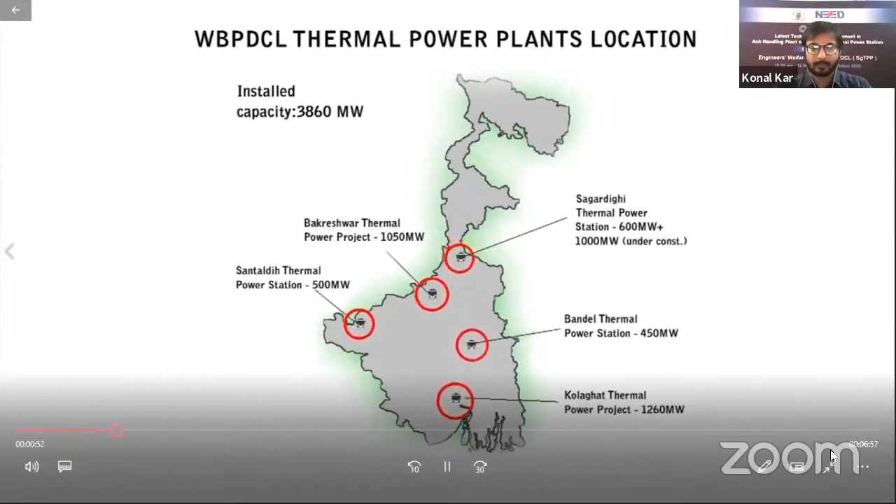It operates through its local bodies based in Sagardighi Thermal Power Project, Santaldih Thermal Power Station, Bakreshwar Thermal Power Project, Kolaghat Thermal Power Station, Bandel Thermal Power Station, and the WBPDCL Corporate Office at Kolkata.

EWF has time and again come up with practical and relevant training courses for its engineers in the areas of vibration analysis and balancing, coal characteristic and sampling, NDT boiler tube metallurgy, power transformers operation and maintenance, availability based tariff, GST, and also in regular software domains like Advanced Excel, AutoCAD, MS Project, etc.

Prayas, the flagship social event of the EWF, is an effort through which a total of 500 underprivileged but meritorious school students residing around WBPDCL's power stations are felicitated every year with school bags and a year-long supply of study kits. This initiative also aims to nurture and fulfill the social obligations of our engineers. Such events help develop a cordial relation with the underprivileged local people at various power stations.

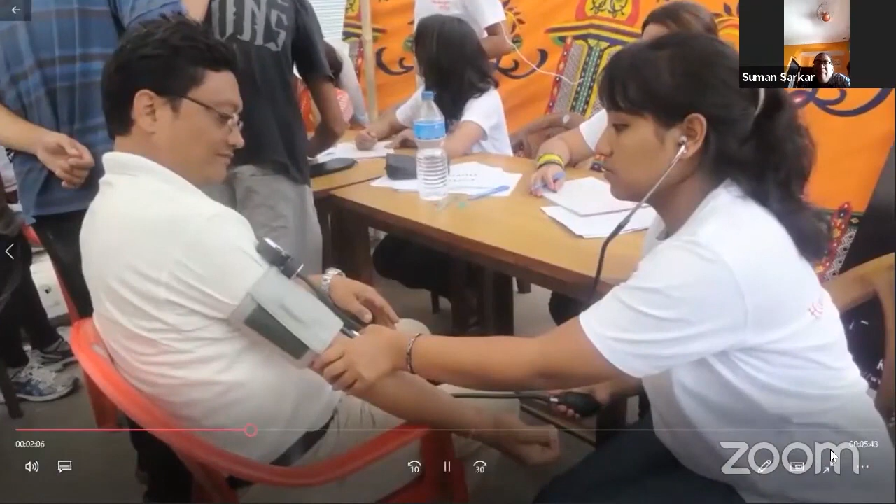In view of the shortage of blood at different blood banks of West Bengal, EWF came forward to organize blood donation camps at the townships of Kolaghat and Santaldih thermal power stations in the year 2016. The Honorable District Magistrate of Purba Medinipur, Dr. Rashmi Kamal, IAS, and Dr. A. Datta, the Chief Medical Officer of Purulia, graced the occasion as chief guests respectively. A sum of Rs 50,000 has also been donated to the Chief Minister's Relief Fund for the Nepal disaster.

EWF also operates catering services at remote power stations through its self-functioning eateries. This helps engineers staying away from their families avail home quality food at reasonable prices even at distant locations.

Eateries, especially the one at Santaldih Thermal Power Station, have greatly benefited the engineering community since finding food at that remote location used to be a huge ordeal before.

National seminars and workshops have been organized by EWF every year under the flagship program NEED, National Energy Excellence Drive, covering energy-related issues which may enrich the Indian power sector.

So far, the following national seminars have been organized: Importance of Water Chemistry in Thermal Power Plant in 2011, Coal Management for Thermal Power Plant in 2013, Emerging Power Scenario in India in 2014, Non-Conventional Power Scenario in India in 2015, Competitive Economics of Indian Thermal Power Generation in 2016, and one workshop on Pollution Control in Coal-Based Thermal Power Plant in 2017.

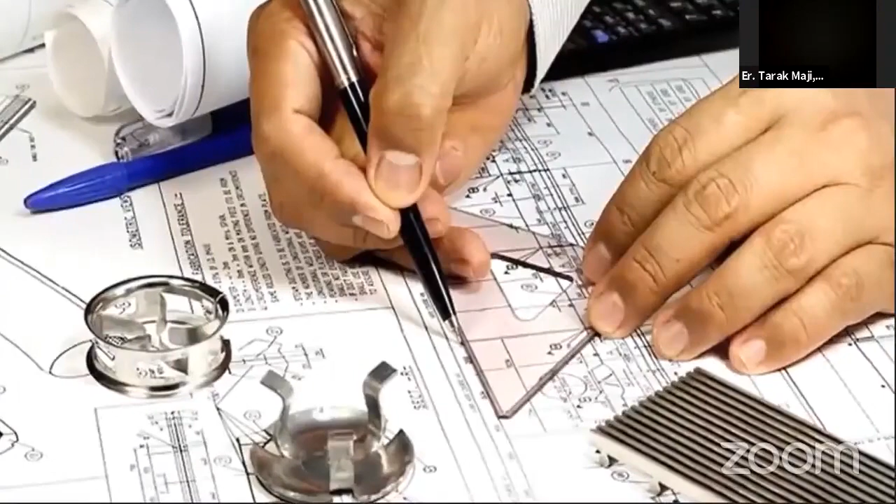Engineers Welfare Forum has come a long way from being a nascent body of few visionaries to a collaboration of almost 700 engineers of the WBPDCL.

All along, EWF has nurtured the aspirations of its young engineers who in turn have pulled out WBPDCL from stasis to growth and prosperity. Engineers Welfare Forum of the WBPDCL pledges to continue this journey with similar grit and enthusiasm in the coming years.

Thank you so much. That was a lovely video, and from this video, you have come to know about the lovely job done by EWF, not only to raise their organization but to help socially towards other people and organizations.

Adding to this, in the last 6-7 months we were having ups and downs. To be precise, we were having a hard time where many lives have been lost in this pandemic, where people are stepping forward, people are moving forward, lending their helping hand towards the frontliners, where EWF is not lagging behind. EWF has come forward and donated a sum of rupees 2 lakh one, and delivered a cheque to Ramakrishna Mission to help the frontliners and to fight this COVID-19.

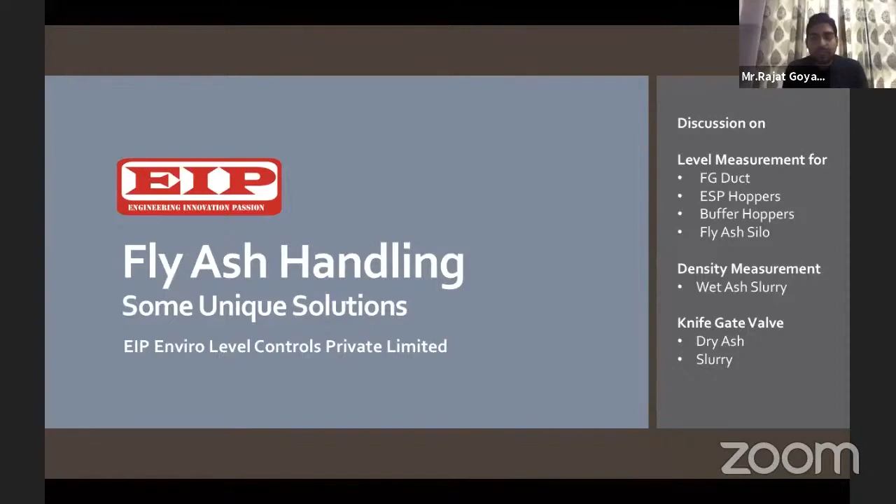Without wasting time, we will shift on to the topic that EIP Enviro Level Controls Private Limited is offering for today, which is basically fly ash handling and some unique solutions. Before we start the presentation, I have a brief introduction about EIP.

EIP is a company that started in 1983 by Dr. Ravinder Goel, and we started with the first indigenous manufacturing of the RF level switch for ESP fly ash hoppers. We take pride in the fact that currently almost 80% of the power plants in India are using EIP's RF level switch for their ESP fly ash hoppers.

Since then, we have moved on to a different product portfolio, which includes all the ranges of level measurement products, starting from point level measurement to complete inventory level measurement, then flow measurement, density measurement, and some valves. In the last 3 decades, we have been highly focused towards our customers, bringing them the most advanced solutions and providing prompt services. That has been the reason behind our success and persistence for the last 30 years.

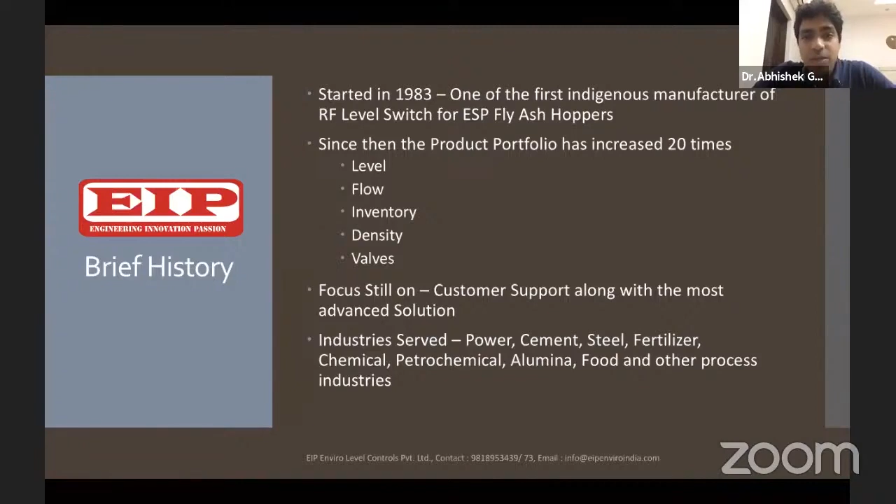The industries we are catering to are power, cement, steel, fertilizer, chemical, petrochemicals, alumina, food, and other process industries. So basically, wherever there is a requirement for level, flow, inventory, or density, EIP is always present with a unique solution to offer to that industry.

Now we will move on to the first topic of discussion. I'll brief you about the structure of the presentation. We'll be covering the presentation in form of challenges, discussing a challenge faced by the ash handling plant and the solution EIP has to offer for that specific challenge. Challenge 1, we will talk about the FG duct.

I'll just request Mr. Rajat to brief about the challenges being faced in a flue gas duct. Over to you, Rajat. Thank you, Abhishek. First of all, good morning to all, and thank you for this opportunity. This is a special application which we did in collaboration with NTPC recently.

What we observed with NTPC was that in the FG duct, the duct between boiler to ESP, in plants above 500 megawatt, the velocity of ash traveling from boiler to ESP was very low when the plant was not operating on full load. Due to that, the ash was getting accumulated in the flue gas duct.

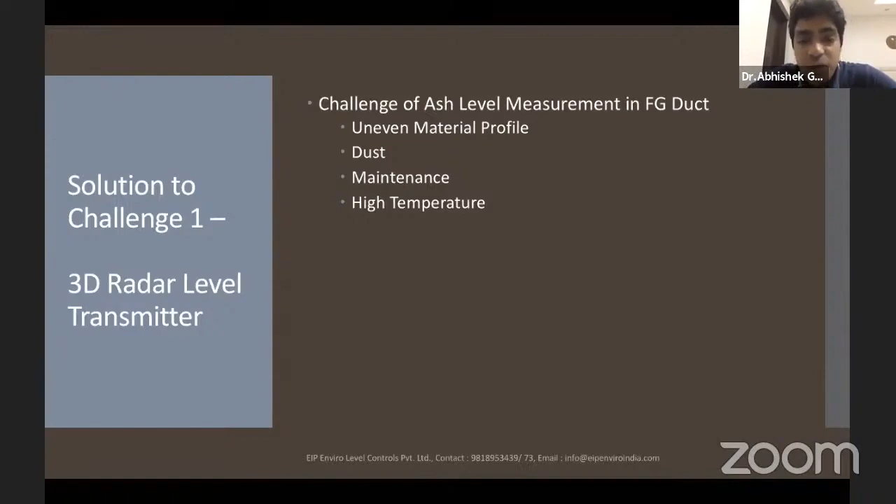Why is ash accumulation in the FG duct very critical? The reason is the ash always accumulates in an uneven profile. There will be a lot of dust, maintenance issues, and very high temperature to the tune of 350 degrees Celsius. So the solution we offer is a 3D radar level transmitter. There are 4 critical points in the FG duct starting from the boiler to the ESP, wherein the ash accumulates the most.

Therein we will install our 3D radar level transmitter, which is the world's first multi-beam radar operating at a frequency of 140 gigahertz. What it provides is the average level of the ash accumulated within that critical point, the maximum level of the ash accumulated, minimum level, and the volume of ash within that critical area of the FG duct. It works in heavy dust without air purge and works at very high temperature.

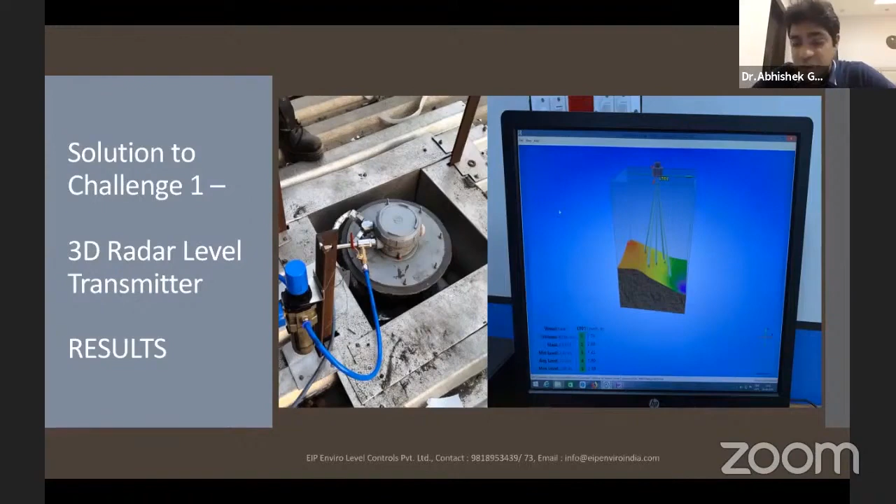Now we come to challenge 2, which is basically fly ash silo level. So people usually ask us, why is it critical to measure fly ash level? The reason is fly ash these days is revenue. And as they say, a penny saved is a penny earned. So the inventory management of fly ash, if that can be regulated, is a direct revenue to the plant, because we are selling the fly ash to cement plants and other process units.

Now, again, the fly ash measurement, as for any bulk solid, is critical because fly ash is always accumulated in an uneven way. There is a lot of dust inside a fly ash silo, and there are multiple maintenance issues. Added to that, fly ash silos are running almost 24 hours. There is filling or emptying, some process always going on. So you cannot miss a reading of inventory, and you cannot afford a shutdown caused by a level transmitter in a fly ash silo.

So the solution again remains the 3D radar level transmitter, whose features I've already explained. On the right side of the screen, you see how a 3D radar level transmitter would be working in a fly ash silo. It has 5 beams in different directions. Using these 5 beams, I'm able to generate a real-time 3D profile of the material because it has XYZ coordinates of those 5 points. Joining them, we get a real-time profile of the material.

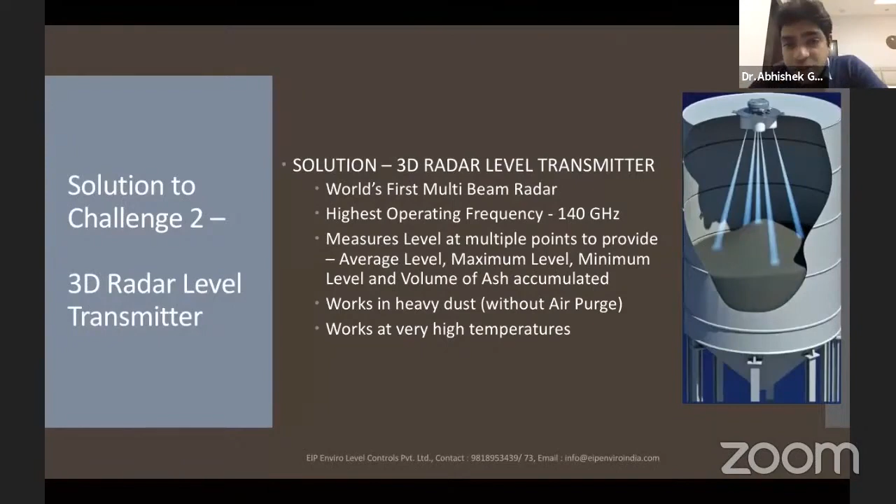As the world is currently moving towards complete 3D profile management for various activities, we also say why not do a complete 3D profile assessment of bulk solids and powders, because this gives you a lot of information about your inventory. And obviously you have the volume and the mass at hand at all times. Now let us have a look at a small video on the 3D radar level transmitter.

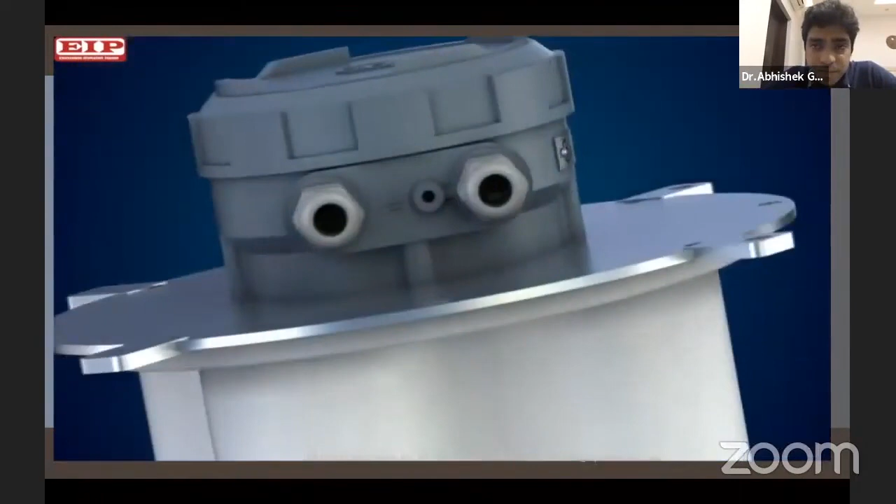So as I said, this is at 140 gigahertz, and you see this is a single beam measurement. You can see the kind of error you may have because of a rat hole that is formed, something like this. Now, if you have a 3D radar level transmitter installed in the same silo, you will have a profile which is real time in nature, and you can see on the left side the profile is generated just like what is shown on the silo.

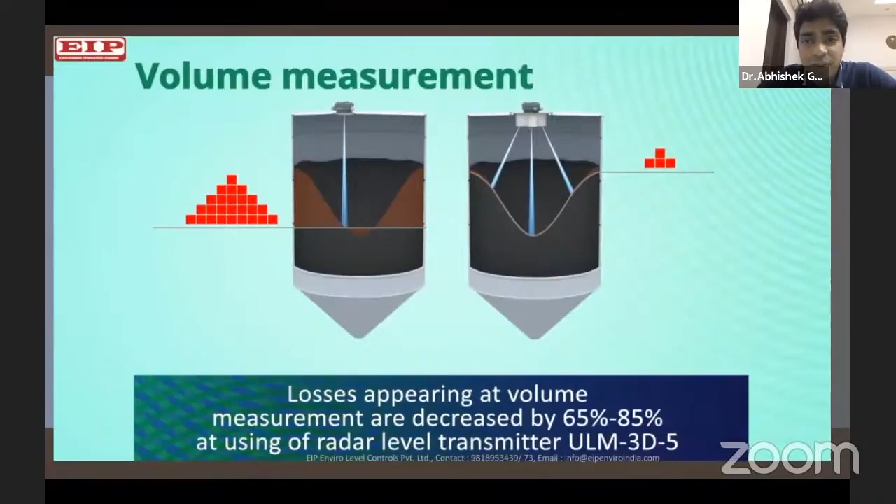And when you do a comparison, you can achieve very high accuracies to the tune of 2 to 3% when you use a 3D radar level transmitter compared to a single beam radar level transmitter. This is a real live video where we have a silo, and you can move the 3D profile and actually see how the material is taking shape within the FG duct or a fly ash silo. So these are 2 sensors installed in the same silo. You can easily imagine, with a single beam radar, how uneven my readings would be.

So now I will move on to the next unique challenge, which is very close to the heart of EIP. Why I say heart of EIP is because EIP started the business with ESP fly ash hopper level measurement. We mentioned the RF level switch, which 80% of the power plants in India are using. EIP make RF level switches, and 100% of the power plants have a mandatory requirement of an ESP ash level indicator or an RF level switch.

So this topic is very close to our heart because we understand that ESP level measurement is very critical. And why do we say it is critical? The reason is in front of us in terms of the recent accidents where we have witnessed ESPs collapsing in well-established big power plants. Current measurement is only a switch. A switch gives a high and low level. You never know what is happening apart from that high or low level.

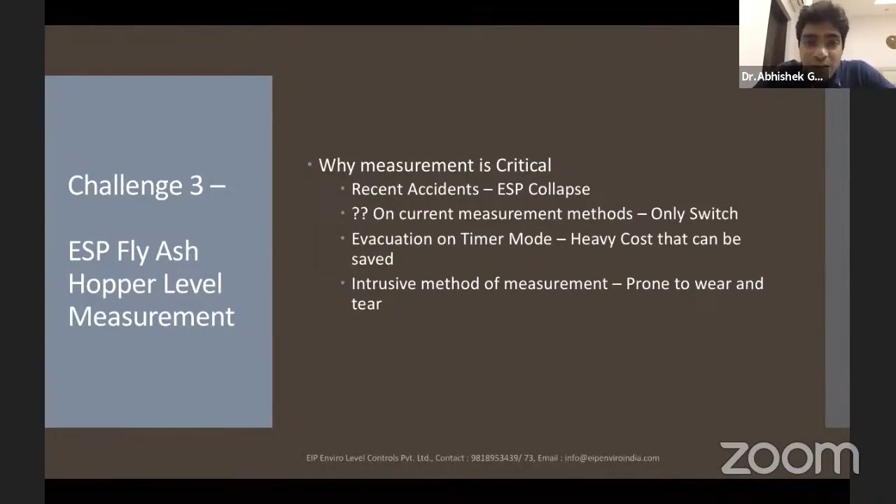Then again, the fourth point of criticality is whatever measurement principles we are using are intrusive type. What I mean by intrusive is it is installed within the ESP hopper. Anything that is installed within the ESP hopper is prone to wear and tear. The reason being, the fly ash in the ESP hopper is high temperature. There is a lot of electrostatic charge, and plus ash has its own abrasive nature. So all these points make it very critical to have a very robust system for ESP ash hopper level measurement.

So let us look at the principle behind it. The principle is very simple: the NOGS sensor detects the gamma rays which are present in the fly ash. Yes, the coal fly ash is radioactive. There is a separate theory which says why coal ash is radioactive. You can send us an email after the presentation if you want scientific literature on that. But as of now, let us focus on the fact that coal fly ash has radioactive gamma rays, and the NOGS sensor is only detecting those gamma rays.

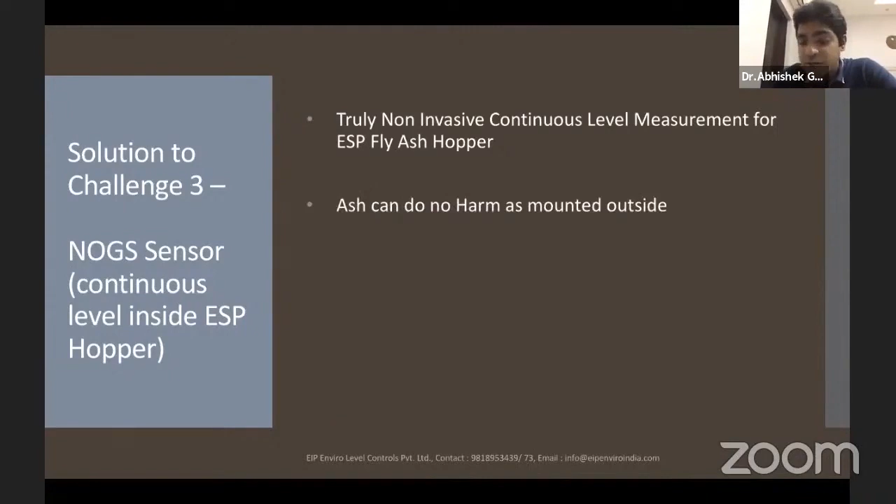So you see, this is completely non-invasive continuous level measurement. Fly ash can do absolutely no harm to this sensor. It is easy to calibrate, easy to use. It is like your eyes inside an ESP hopper. So you can now virtually see what is inside the ESP hopper in a continuous measurement through this NOGS sensor, and you can practically operate your evacuation based on this NOGS sensor. So what we say is the evacuation now is running on NOGS mode.

NOGS mode is wherein this NOGS sensor gives you a feedback automatically: yes, this hopper needs to be evacuated. This is truly a cost saving benefit wherein you can realize the return on investment from day one of installation of this NOGS sensor in the fly ash hopper.

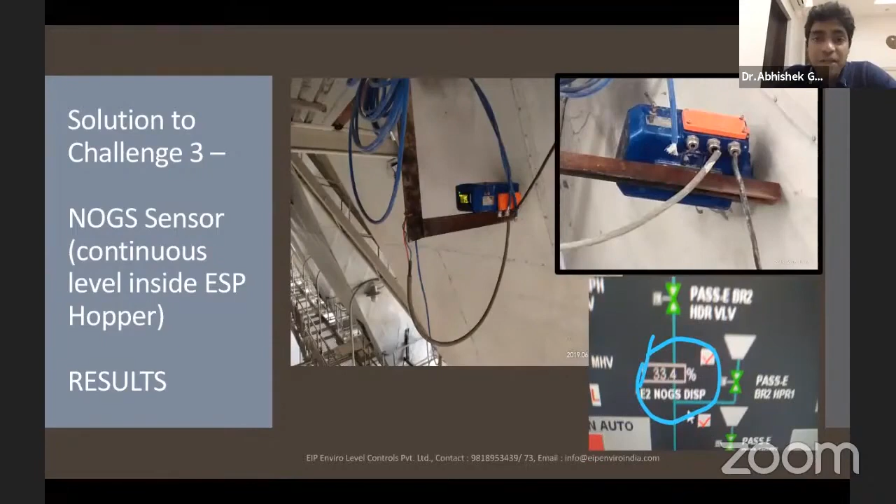So now let us move on to challenge 4, buffer hopper level measurement. Again, buffer hopper is the intermediate transit hopper wherein overfilling and underfilling are critical problems, and it is operating at a very fast speed. It fills up very fast, empties very fast, and it is in continuous operation. The challenges of buffer hopper remain the same as fly ash: dust, maintenance, 24-hour active, and high temperature. Adding to that is high pressure inside a buffer hopper.

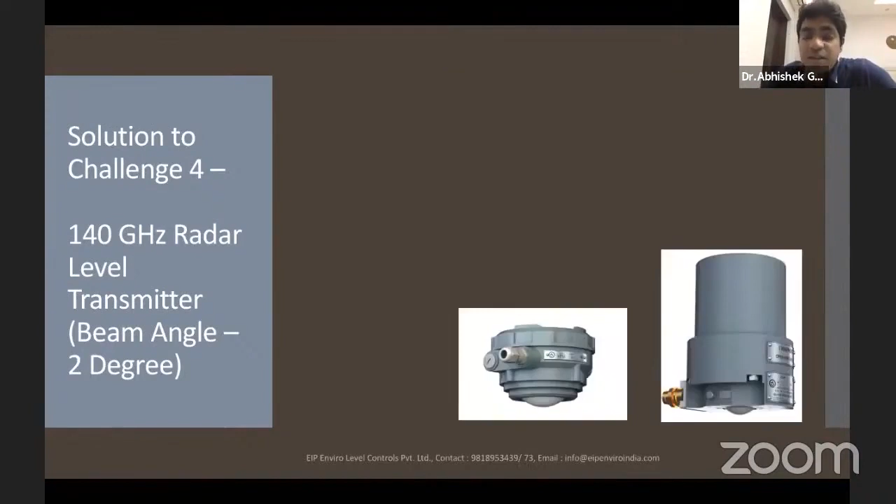So what is the solution that we offer? Because a buffer hopper is very small, maybe 3-4 meters, going with the 3D radar technology may not be always advisable given its size. So we have this 140 gigahertz radar level transmitter installed in the buffer hopper. It is the world's smallest beam angle radar, at 2 degrees, works in heavy dust without air purge, with very high temperature, and can even pass through a blind PTFE.

This is a fact to be noticed. If you see this small sensor in the center, if you place a PTFE disc below this sensor, a blind, the rays can pass through it and get back through it. This is the kind of accuracy and power with which this radar level transmitter works.

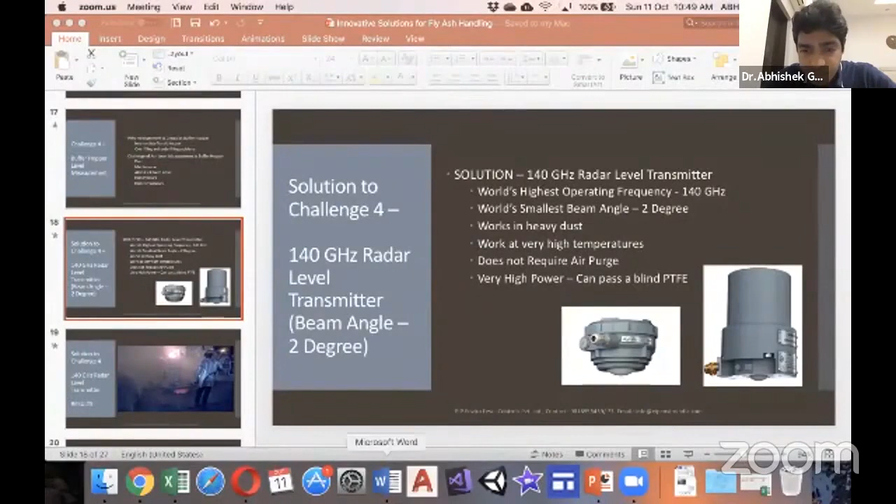So I'll just share my screen once again because I have a video which I want to share. Just a second. Share computer sound. Just a second, sir. Is the screen visible, sir? Rajat, screen is visible? Yes, sir. Screen is visible. So I wanted to show a video. Is the voice coming? Yes, it's coming.

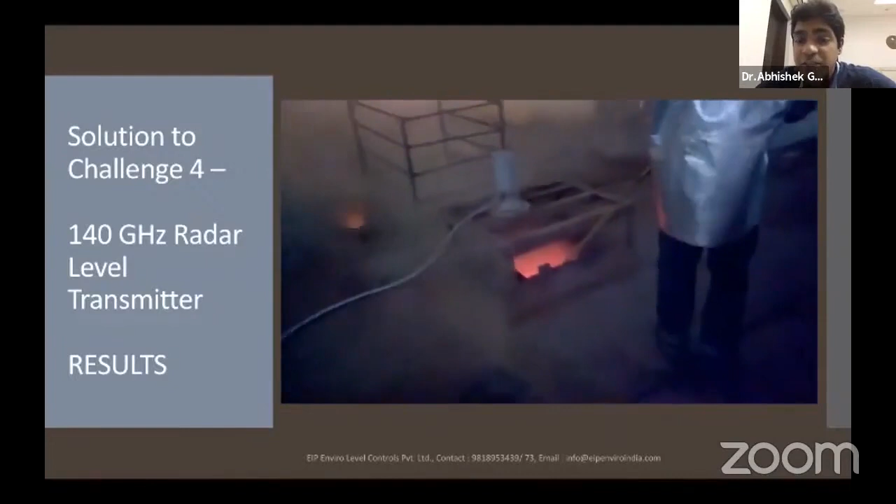This is an installation of this kind of radar, not in a power plant, but installed at a temperature of 1200 degrees Celsius, working in such a stringent condition. You can see there is dust, fumes, temperature, and this radar level transmitter is giving an accuracy close to 2 to 3 within this environment. This is molten metal being poured inside a vessel, and if something works in this stringent an environment, it is supposed to work in a buffer hopper. So this small video shows that this 140 gigahertz radar level transmitter is the most optimal device for buffer hopper level measurement.

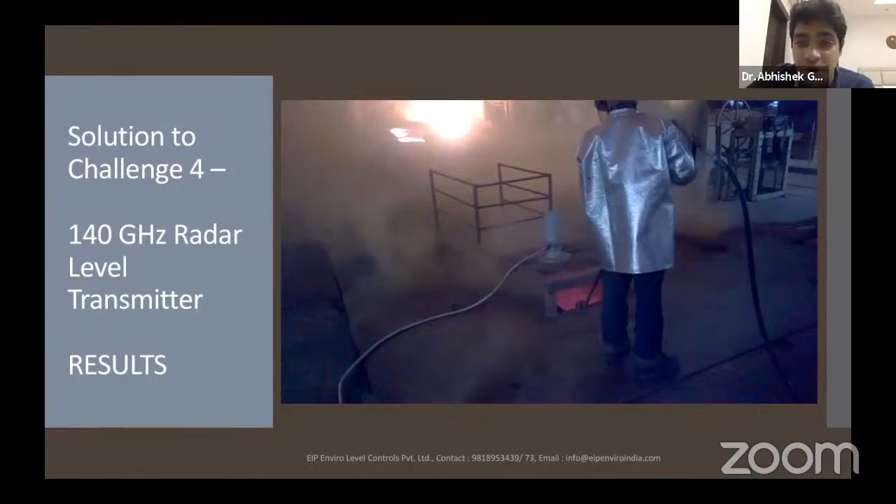Now we come to challenge 5, which is density measurement of wet ash slurry. This is applicable for power plants having wet slurry discharge. Why is density measurement of wet ash slurry important? Because if the slurry is too dilute, there is loss of water, and if the slurry is thick, we have chances of pipe choking. These are very brief, gross level criticalities for ash slurry measurement.

The current challenge faced by the industry is that the density measurement which actually works easily is the wetted and contact type. But the problem with wetted or contact type is it does not last long in ash slurry. Ash slurry is very abrasive. It damages the sensor, it chokes the sensor, it chokes an inline density meter. Whether an orifice type, a Coriolis type or a vibration type, whichever contact type density meter you use, it does not work for long and is practically of no use. The only non-contact solution currently available to the industry is nucleonic type. But the nucleonic type has its own problem.

It has AERB restrictions. There is license for usage. You might be needing a radiation safety officer. You need to submit a report every half year. And there are chances of frequent surprise inspections by AERB.

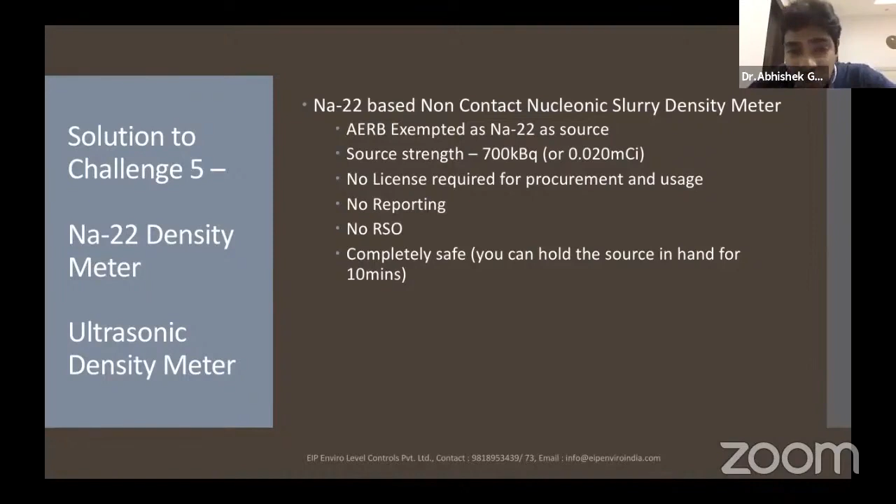The second solution that we have is ultrasonic clamp-on slurry density meter. Yes, you have heard of ultrasonic clamp-on flow transmitters, but we have introduced an ultrasonic clamp-on slurry density meter. It works on the principle of sender and receiver ultrasonic waves, wherein the attenuation of the ultrasonic waves gives an accuracy as good as a nucleonic device. So density measurement can be done as accurately as a nucleonic device. It is mounted outside the pipe.

Now the question comes up, which device to use? Basically this is an application problem, so we request customers to send us the application details, like the diameter of the pipe, size of the pipe, the slurry, expected slurry density, and based on that we take a decision whether ultrasonic would be the best fit or an AERB exempted nucleonic density meter would be the best fit. So again, this is a solution which the power plant industry was looking for, and here we are with a solution for the measurement.

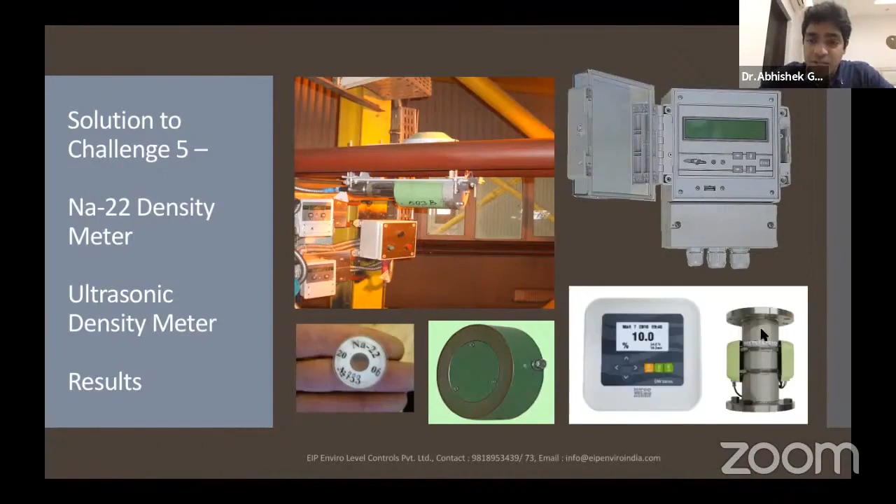So I just want to clarify these 2 points over here: this nucleonic density meter for slurry measurement uses a source and a detector which are exempted from AERB. Continuous level measurement for the ESP hopper was using only a detector. There was no source and there is no approval required. This is the ultrasonic clamp-on density meter. The picture on the right bottom is the ultrasonic clamp-on density meter.

So now I would request Rajat to enlighten us about challenge 6, what we call the valves for dry fly ash and ash slurry. Over to you, Rajat. Thank you, Abhishek. So in ash slurry applications, one of the major challenges faced by the customer is transportation of ash, generally fly ash and ash slurry.

So the knife gate valves conventionally installed in an ash handling plant generally tend to wear down due to the abrasion and corrosion of slurry. Fly ash is a very abrasive slurry. So generally in 2 months' time, conventional knife gate valves tend to wear down, and every 2 months the customer has to take a shutdown and replace the seat, gate, and the body.

So this is one of the challenges customers are continuously complaining to us about. And generally this shutdown time is quite long because these valves are heavy and replacement takes a lot of time. And it's very expensive also, like in fly ash, what we have experienced in the DVC plant, Durgapur. The fly ash is being transported to one of the cement factories, and replacing the valve continuously after 1 or 2 months is very expensive, and they have to completely stop the line and then replace the valve.

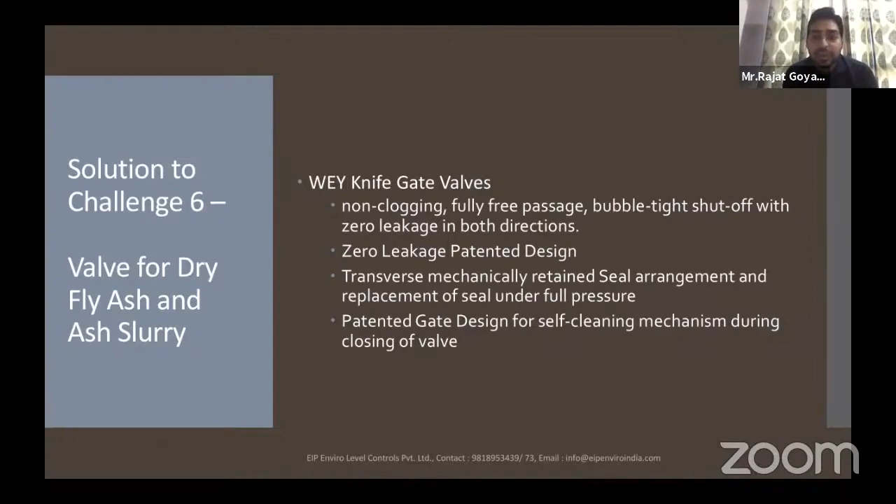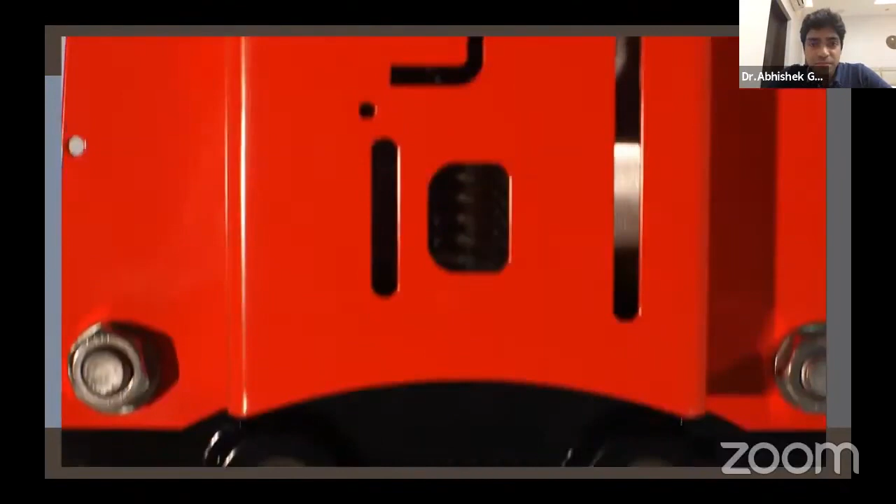So the specialty of these valves is in the gate design and the body design, which is a patented design of this Swiss company. As you can see, the gate design is a straight gate. Conventionally, the gate design is a 180-degree arc. Here it's a straight gate with a mechanically retained seal between the two bodies. While in service, as you can see, there's leakage during operation after a year or two.

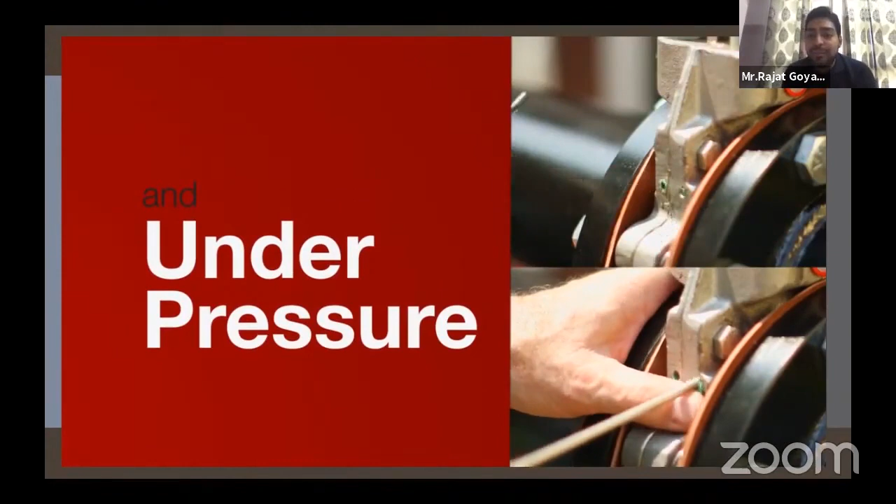So in full pressure condition only, we can replace the seal kit. We just have to unscrew the two nuts and we can insert the seal kit, and again, our valve is good to go. Against emergency downtime, this helps in reducing the shutdown time. We do not have to take the valve out and then do the replacement of the seal kit. As you can see, again, in full pressure condition, the valve is good to go.

We have a unique transverse seal. This is according to the applications of the customer. So in ash handling plants, we have a unique transverse seal. This can be replaced in full pressure condition. While opening or closing, unique gate geometry promotes self-cleaning. As I told you, this gate is a straight gate. So automatically the design of the gate helps in cleaning of the valve when it closes down.

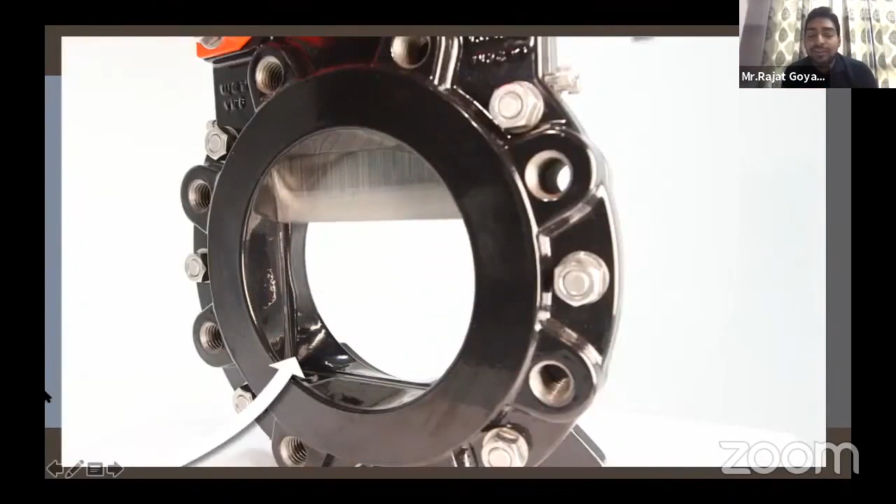Self-cleaning without flush ports. Complies with AWWA C520-10. Reduced chest cavity prevents solids from jamming. As you can see, this is automatic without flush ports. When the valve closes, automatically it cleans the valve and closes down. This is because of the special design of body and gate which they have. With full pressure, both directions. Non-rising stem saves space, for installation in tight locations.

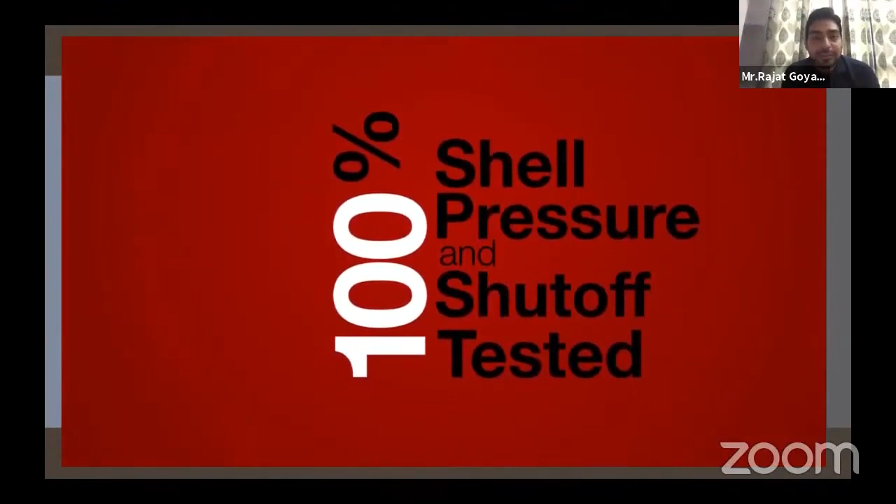In fact, these valves are used in petrochemical industries. These are 100% suggested by the licensors of the technologies, like DuPont and Belco. And in various Indian petrochemical plants also, these valves have been installed, with ongoing cost savings. The conventional valves have been replaced by these valves, where the licensors have recommended our valves for plug valve applications. In fact, in various NTPC plants also, by the performance feedback of customers from other NTPC plants, they have replaced the conventional valves with our knife gate valves.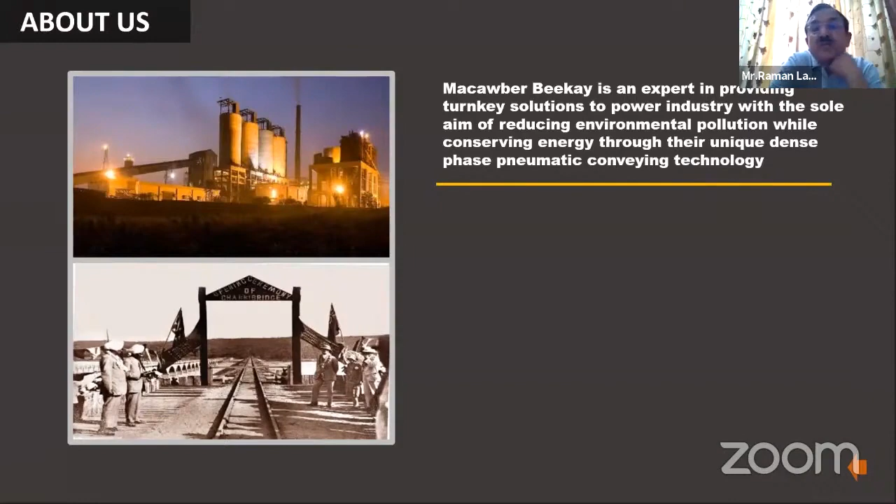Macawber Beekay is a 100-year-old company that started with civil works, and finally in the 1980s, in 1986, we started ash handling systems. Earlier we started with civil works, and the Chakki Bridge, which connects Jammu and Kashmir and Pathankot, was constructed by our group company BSBK.

The ash handling system was established in 1985-86. Then a joint venture company named Macawber Beekay was formed in collaboration with Clyde Bergemann, and that joint venture existed up to 2015. Now 100% of Clyde Bergemann's shares have been purchased by Macawber Beekay, making us a 100% Indian indigenized company. We have done 1,800 ash handling plants in India, ranging from 10 megawatt to 1,000 megawatt, and we have also done ash handling plants outside India in Indonesia and Malaysia.

This is our manufacturing unit view and office view. As I already said, we do all types of ash handling: high concentration, lean, pneumatic, and we also do coal handling and alumina red mud handling systems. Here are pictures of our site locations.

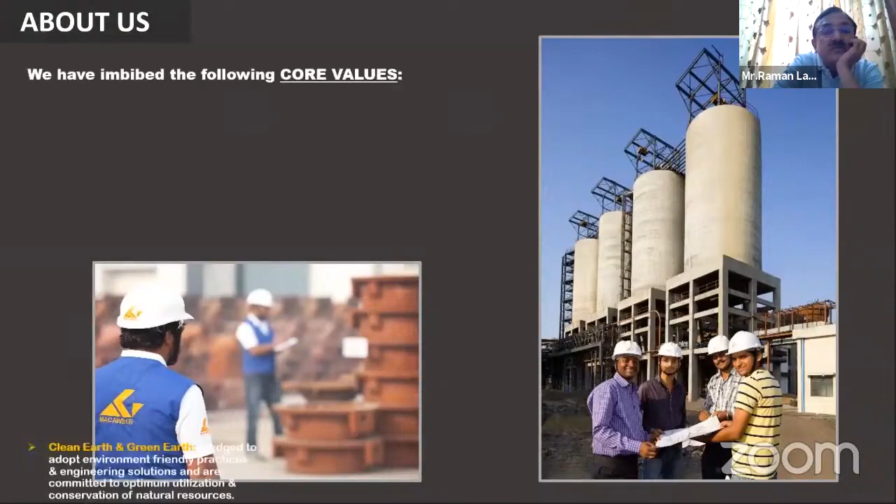We do coal handling, bottom ash handling, fly ash handling, ash slurry disposal system, coal reject material handling, pneumatic conveying system, red mud, and operation maintenance as well.

These are our products. We do all types of vessels, special valve, dome type valve, and a variety of ash conveying vessels for conveying from smaller to longer distances. We have the capability to convey dry fly ash directly from the ESP up to a distance of even 2.1 kilometers. We have done it, and we have the capability to do it up to 3 kilometers.

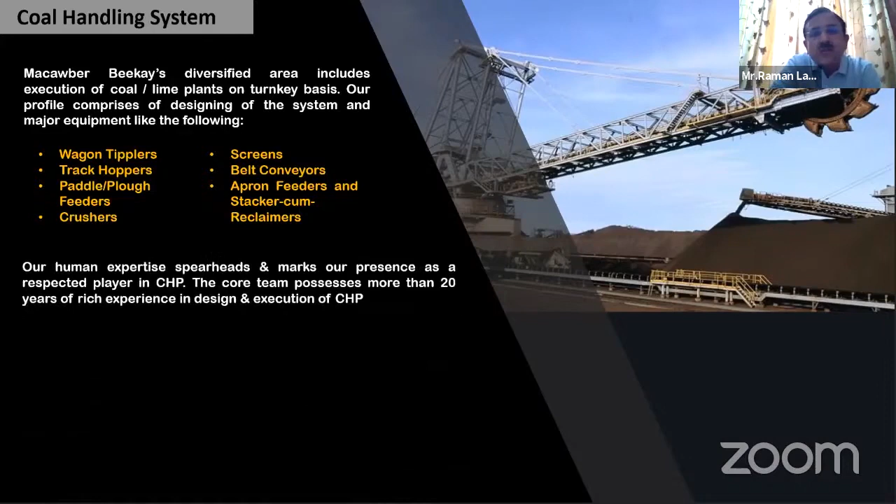This is about the bottom ash handling system. Submerged scraper chain conveyor, this is with the dry bottom ash hopper. Bottom ash is being conveyed up to the silo. Then we have a jet pump system, water impounded bottom ash hopper, jet pump system. Then closed loop, zero discharge, we take the bottom ash slurry to the bin and then water is being recirculated.

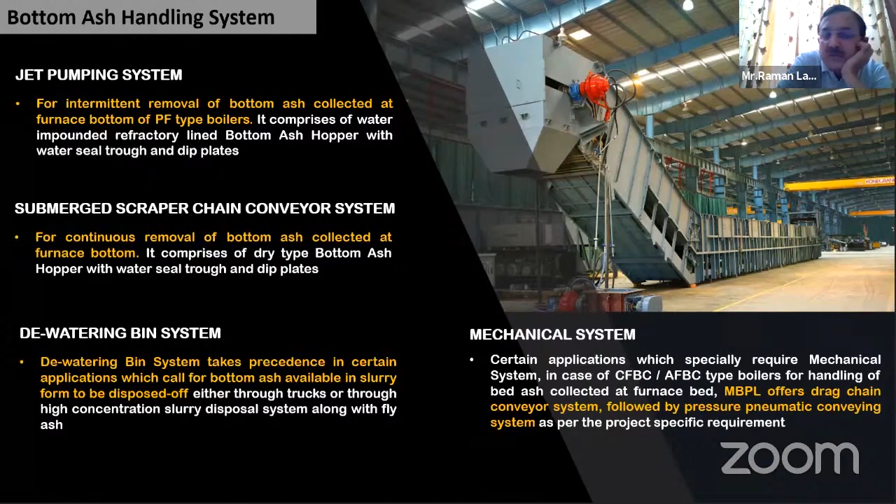We also have done mechanical dry bottom ash type ash handling system with the support from Clyde Bergemann. We manufactured this dry bottom ash conveyor with their support for 3 projects in India.

Then about the fly ash handling system, we have done vacuum extraction, vacuum type extraction system, then vacuum positive pressure dense phase pneumatic conveying system. In the old days we were doing hydraulic type slurry making systems by means of feeder, ejector, flushing apparatus system.

The latest concept nowadays is the high concentration slurry disposal system. We did a number of projects in India for NTPC and various state electricity boards, with a concentration level of up to 65 to 70%, and even a pumping distance of up to 16 kilometers.

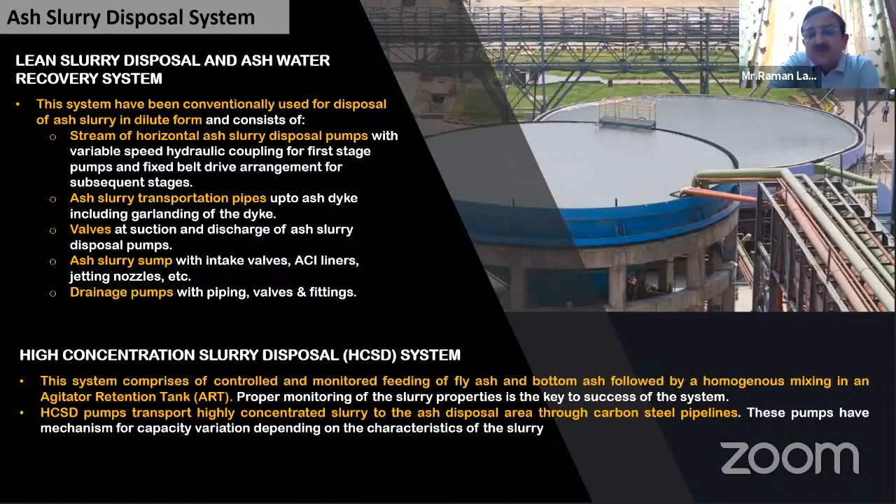We invented the coal mill reject handling system also, to handle the coal reject after milling and take it to the bunker for truck disposal and utilization. We have supplied this to almost all the NTPC projects.

So about the material handling, what we are doing. Besides this, we have done silo unloading systems, open truck, enclosed tanker. We have done wagon unloading systems, and even barge loading systems, not in India but outside India.

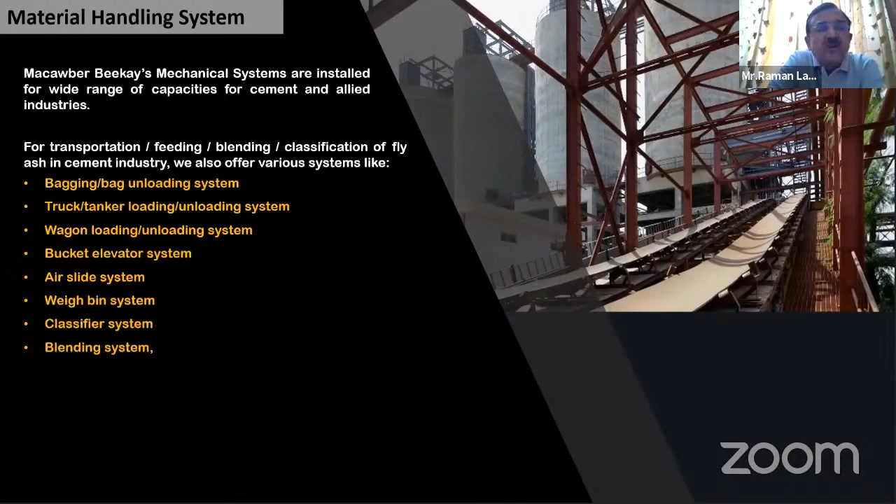Then we did one plant in classification for Lafarge cement. Red mud, we did paste pumping for red mud, this is after the refinery alumina waste. That paste pumping system we did for Vedanta.

This is about the pneumatic conveying system. For various bulk orders, we have the pneumatic conveying system.

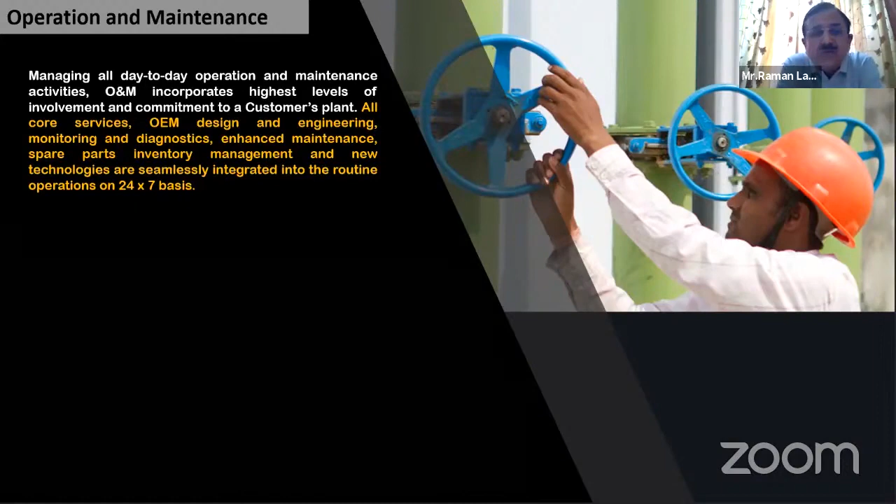Besides that, we do operation and maintenance of the plant. As on today, we are doing operation maintenance for 18 projects for various state electricity boards, and we were doing it for a few NTPC projects as well. And after sales service, we provide all spares to meet the requirement during operation for smooth operation of the plants.

It's about the product, what we are doing is Denseveyor. Denseveyor is a totally enclosed system, and that too is being used for conveying fly ash from the ESP hopper and various hoppers for short distance.

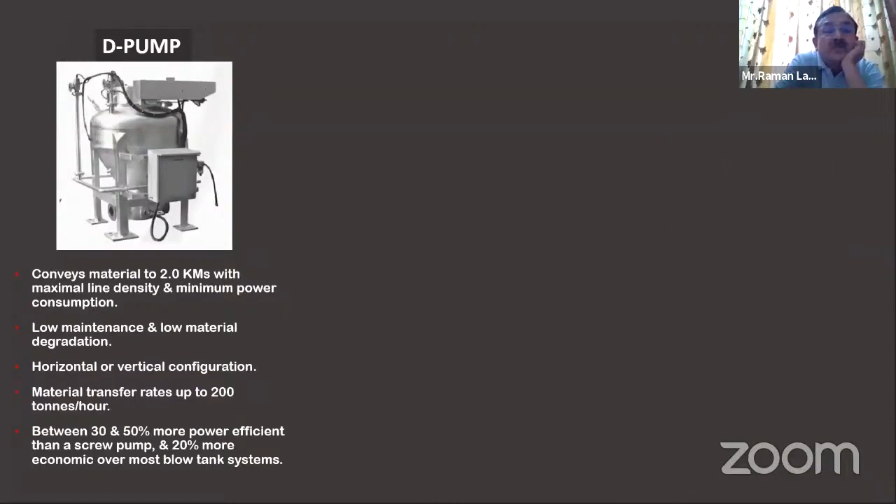Then we have another ash vessel, a multi-connection system. All 4 vessels can be fed from the ESP hopper, and that has the capability to handle up to 400-500 meters. Then we have the MD pump, with capability to deliver up to 1 kilometer. Then the D pump, we go even up to 2 kilometers. Yes, we have supplied up to 2.1 kilometers.

Then open truck unloading system, ash conditioner, pug mill you can say. Then we have a motorized unloading system. This dome valve is a unique, specially designed valve for the ash handling system, and we use it for all applications for isolation, conversion, diversion, and slow time transfer application. We manufacture up to half a meter size.

It has so many plus points, and I think it has been installed in various plants. You might be aware about all these features.

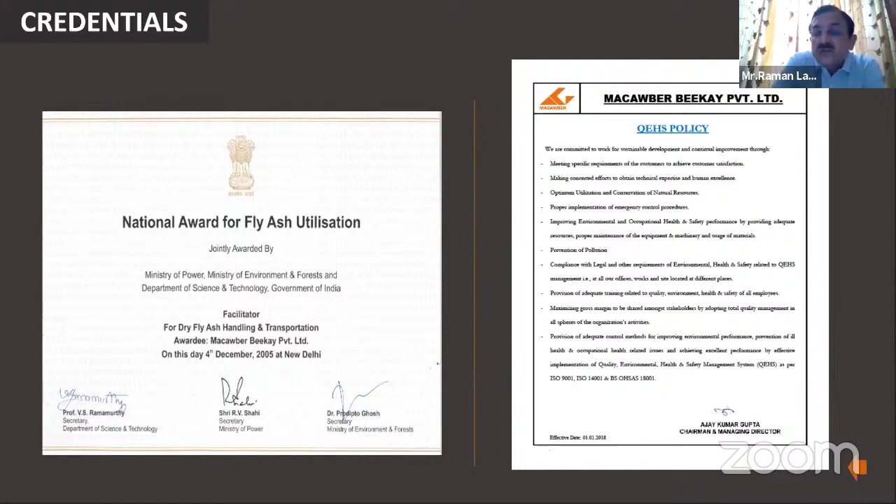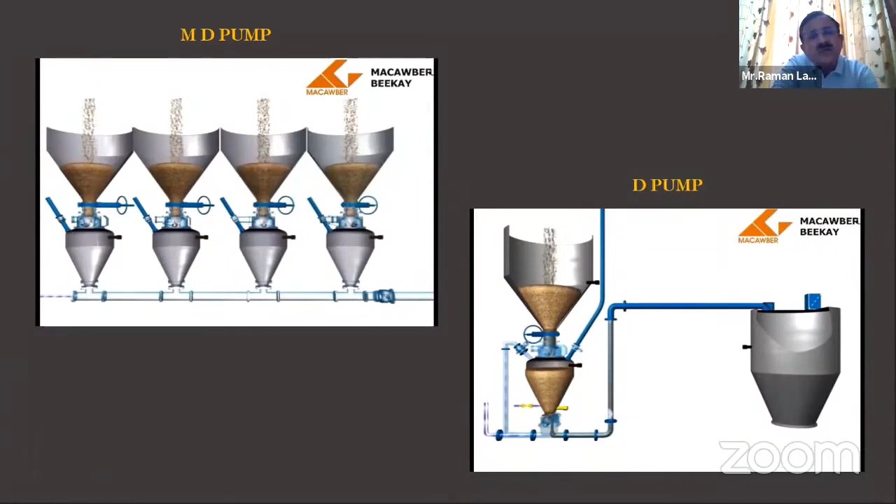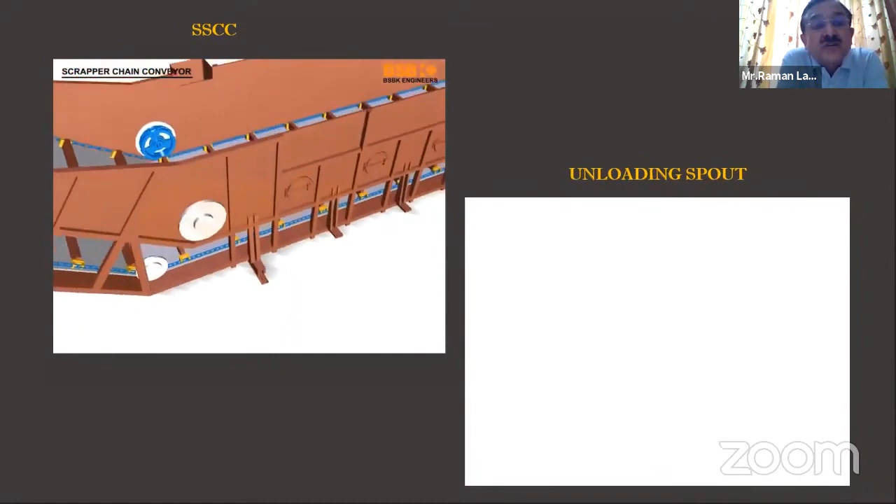See the concept: we manufacture a submerged scraper chain conveyor for bottom ash handling system. Recently we have supplied one for a 1000 megawatt plant in Indonesia. It's fully automatic, with automatic chain tensioning arrangement, hydraulic motor, and motorized base. You can pull out the conveyor for maintenance.

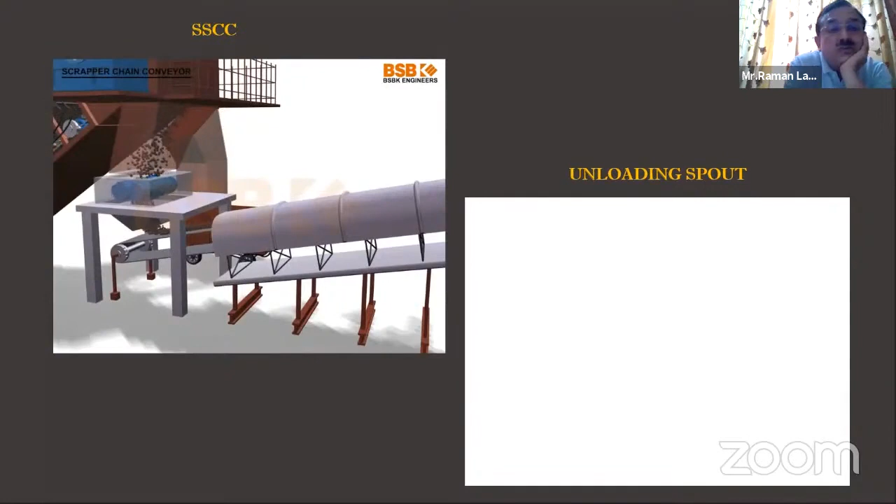Its discharge is passing through the crusher.

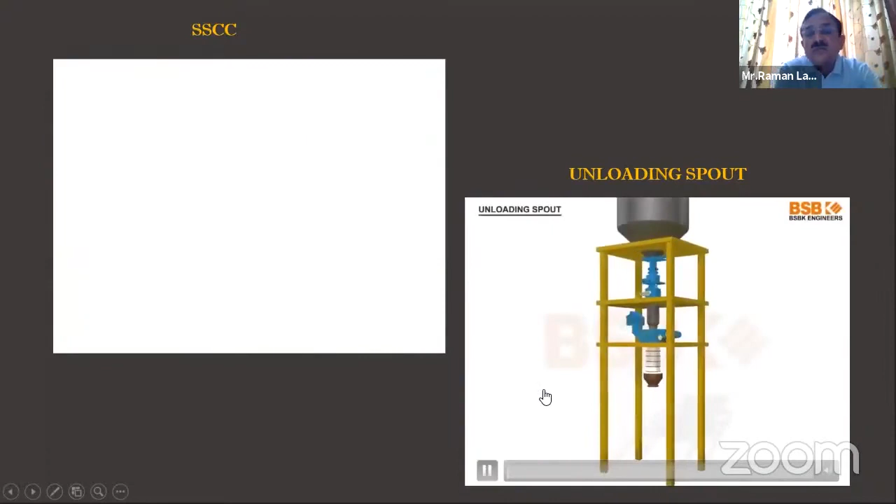Pulling out the conveyor for maintenance. Next, I'm showing you the motorized unloading spout for unloading of fly ash, tanker unloading.

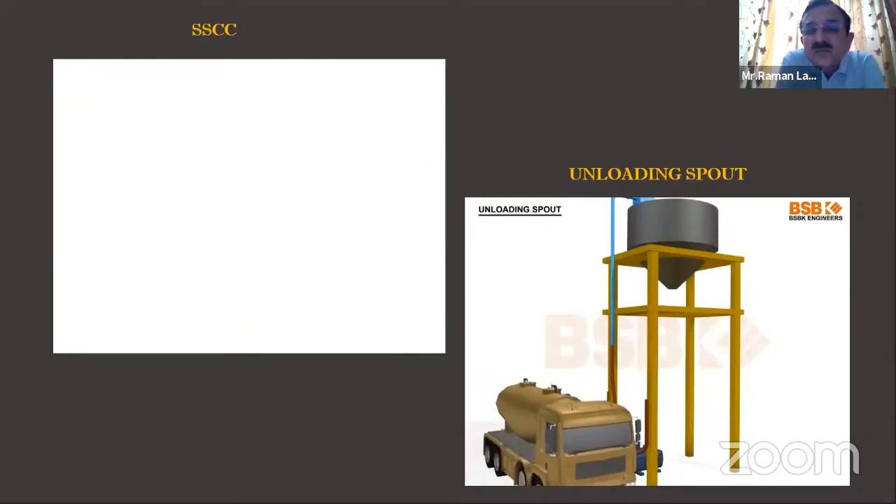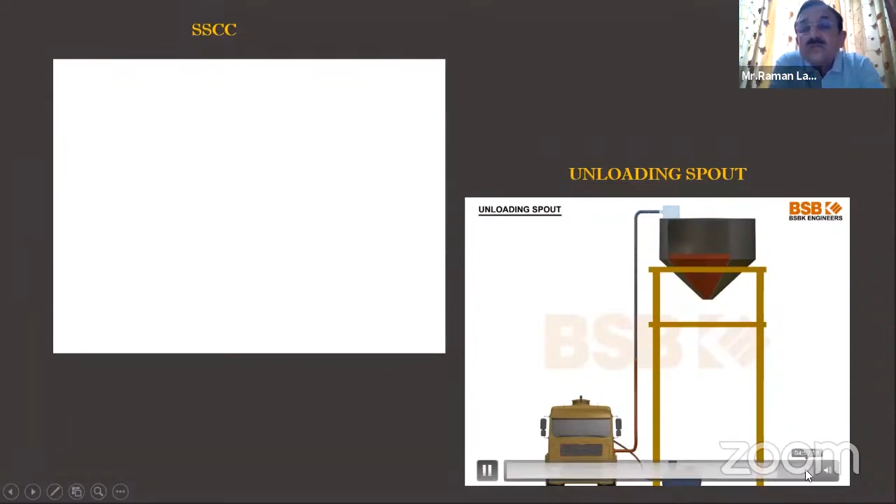This is basically a tanker unloading system. These are installations about the fly ash handling system.

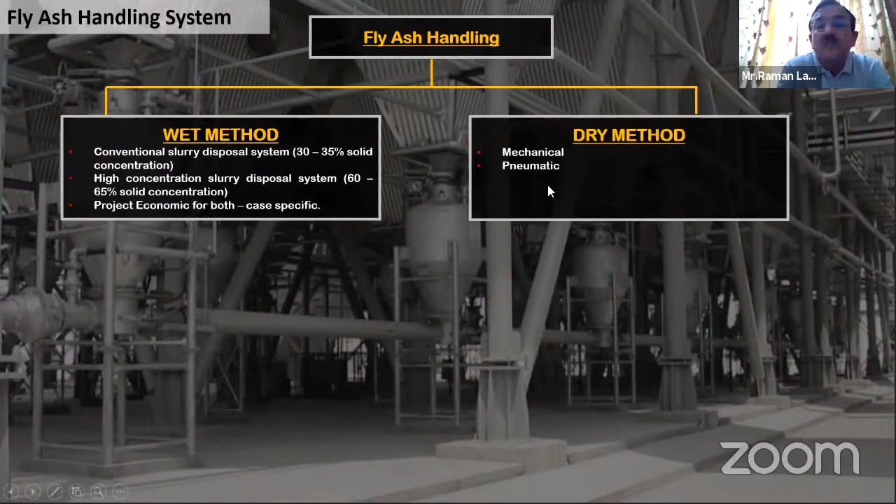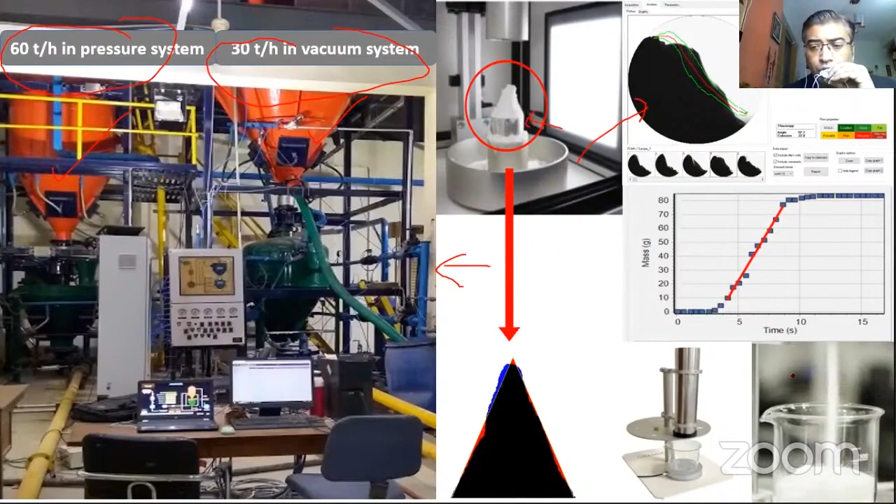So they look into some spreadability issues, the flowability issues, angle of repose, etc. So we can do a lot of testing, both at a macro scale as well as at a micro scale. Now let's go and see what's happening at the plant.

Now, very briefly, what's the plant requirement? What do you want as a customer? There are some vacuum streams working, let us say, just an example, at 60 tons per hour. And then you have your buffer hopper. And then from here, you take straight down to the remote silo. Now, this length could be anything, 500 meter, 1 kilometer, 1.5 kilometer, and so on. This is basically what's your requirement.

Now, what are the common problems that you have? Is everything okay? No, sometimes you face some problems. And when there is a problem, you ask the customer, what's the problem statement? And he would invariably say, we are not able to convey enough ash, under capacity, sometimes the line blocks, and my ESP hopper is going up and up. So these are the broad problem statements.

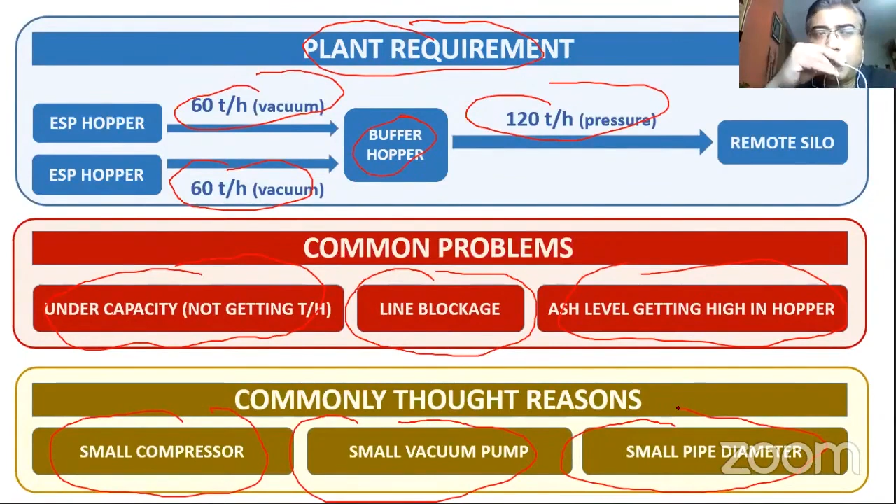And if you ask people what they think about the reasons, people generally say, it's not working, maybe the compressor is small, or maybe the vacuum pump is small, or maybe the pipe diameter is small. So they say these three things: small compressor, small vacuum pump, small diameter. Now, is it all that's causing you the problem? My answer is no. There are 15 plus reasons why your pneumatic conveying system may not work. Let me just read out those reasons.

You might have an undersized compressor, undersized vacuum pump, small pipe size, wrong selection of the location of step up. Maybe the blow tank is small. Maybe you don't have adequate airflow control in the blow tank. That's very, very important. Maybe you are not maintaining enough DP across the blow tank. Maybe your fluidizing pads are not working properly, or you didn't select them properly. Your feeder surface finish, very important. I'll show you some pictures. People often don't pay attention to these things.

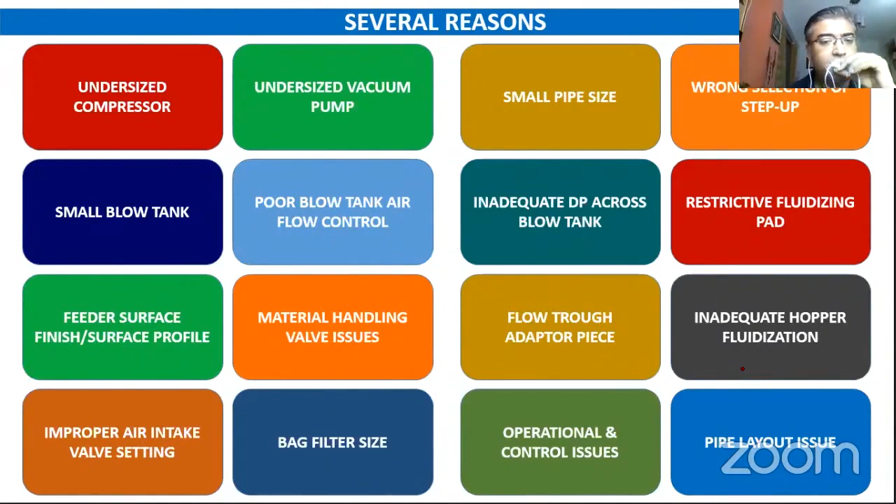Material handling valves, I think some of my previous panelists have also discussed this. Then the flow through adapter piece, the ash can get cool, and as soon as it gets cold, the flowability decreases. Maybe the hopper is not properly fluidized. The question of conveying ash only comes if the ash comes in the line. If it doesn't fall from the hopper, what are you going to convey? Improper air intake valve setting, maybe your bag filter is undersized, some operational control issues, and maybe some pipe layout issues. So there are over 16 reasons. If any of these issues are there, you will be in trouble. There are many issues.

And as an investigator, by the way, we call ourselves investigators, we go about and find these out, just like a doctor with a complex disease. We don't make assumptions. We check, we test, and then we find out the root cause, and then we prescribe the medicine. We don't go by the rule of thumb. We do a proper analysis, based on years of research and understanding of what's going on at the powder level.

All right. So why do designs fail in the first place? There are a lot of things which work. Why is my ash handling system not working? That's because you are dealing with a product which varies quite a lot in terms of properties. The particle density can vary from 1600 to 2400 kg per meter cube. Loose poured bulk density can vary, roughly 600 to 900, in fact even up to 1000. Your particle median size can vary from 60 to 180.

So you have a large variation of your input parameters, and you are asking someone to design it properly when you don't know what's the ash property. So you design something for an 80 micron ash or a 90 micron ash, and you get an ash which is 140 micron. I'm talking about fly ash, the median size, and you will be in trouble straight away. You design something for some bulk density, the bulk density increases by a factor of say 30%, you will be in trouble. So there are a lot of issues, so it's not easy.

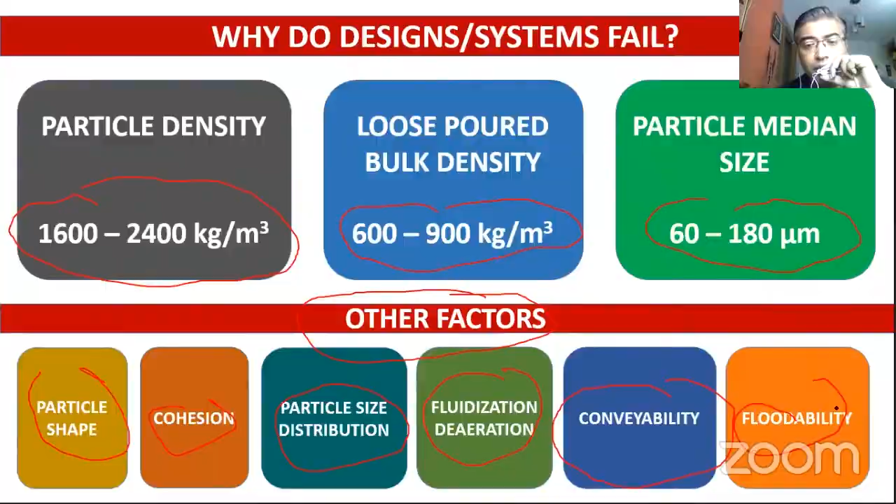Some challenges. If I just pick up some very simple stuff, bulk density, we talk about bulk density, but what bulk density are we talking about? There can be 5 different bulk densities: loose poured, aerated, tapped, fluidized, compressed. You tap your powder, the density is going to change by 50% just by tapping, especially if it is a cohesive powder, if it is a fine powder. All right, so these things can happen.

The other problem is particle size. It's very difficult to get repetitive values of particle size. The problem is, you have tons and tons of ash sitting in your ESP hopper, and then you take a few grams of sample out of it, first kgs and then grams and then milligrams, and you do a laser diffraction testing to get the particle size properly. First, by the way, you should do laser diffraction. If the size is below 80 micron, your sieve is not going to work properly because of the electrostatic charges.

Now the problem is, from tons you have come to milligrams. So how do you know that the stuff you have got is the right sample? Maybe when you took the sample there was segregation in the hopper, right? So it's very hard to get repetitive values. So sometimes people talk about what's the particle size. I mean, what size are you talking about? When you take a sample at 11 a.m. and you take a sample at 10 a.m. and you take a sample at midnight, everything is different, just because of the way you have sampled. So it's not an easy task, and you need to have a technology based approach, not a thumb rule based approach.

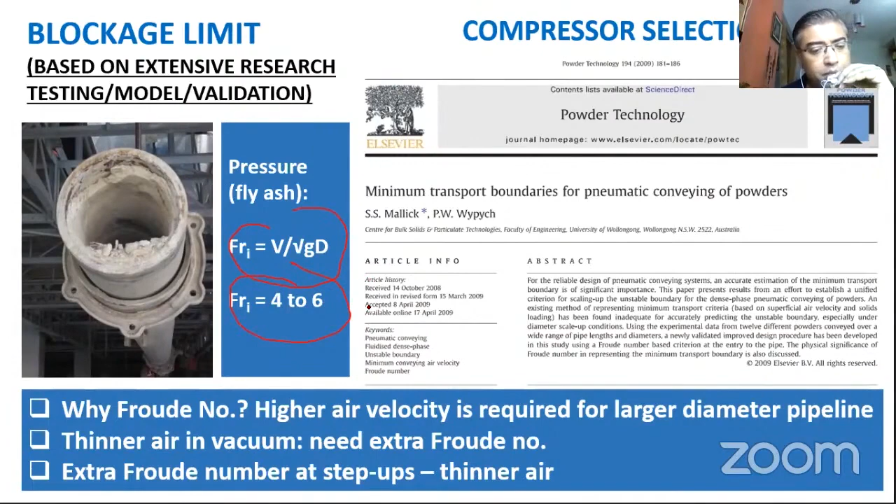Now, what's enough air? Sometimes people say we design based on air velocity, but I personally don't like air velocity alone, because we have seen through many experiments that when your pipe diameter increases, you need extra air velocity. So we use a Froude number based criteria. Depending on the type of powder, your Froude number will vary from 4 to 6. Of course, you have to put certain margins on that. You don't operate on blockages, you put certain margins, and you get the right airflow.

Over a period of time, we have also worked on predicting pressure drop correctly, and our models have been independently verified by people from other countries, and they have found it very good. So what we do is we consider there is a dense phase layer at the bottom, and then there is a dilute phase flow happening above. That's basically your medium phase. So we model these two phases separately. Now I'm going to come to some very interesting points.

Just let me have a little sip of tea.

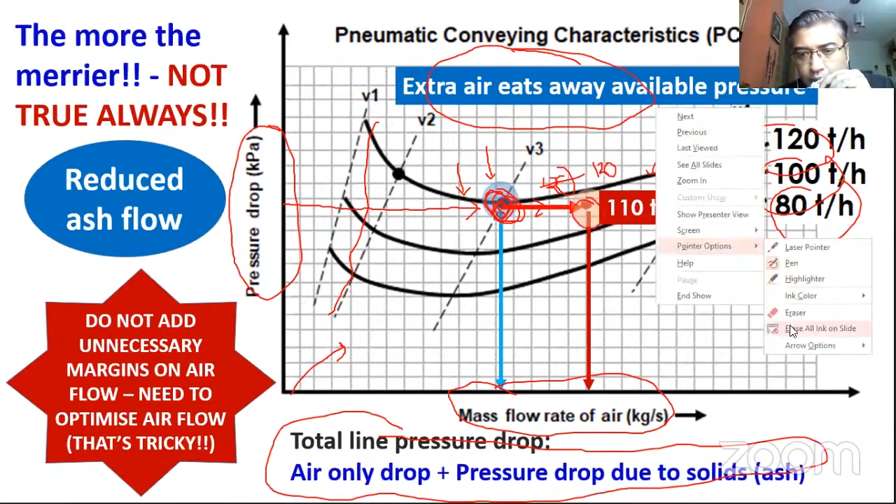Now what happens? You are supposed to be working here, and then you give extra air for the same pressure, because your compressor has a certain maximum pressure minus all those air dryer pressures and so on. So this point now shifts to this point. Let me just clear it. You are supposed to be operating here, and you have thought the more the merrier. So you are now operating here.

The problem is when you come from this line to this point, this point is not 120 tons per hour anymore. It is something between 100 and 120, so probably you are operating at 110 tons per hour. And that's why the design is so critical. It's not one way. You have an upper limit, you have a lower limit. You have to give enough air so that you have reliable conveying, but don't give too much air. Of course you end up purchasing a bigger compressor, but not only that, you may reduce your tonnage.

The other is more straightforward. When you don't have enough pressure, you are supposed to operate here, but you end up operating here, which is from 120 you come down to 100 tons per hour, because you don't have enough pressure.

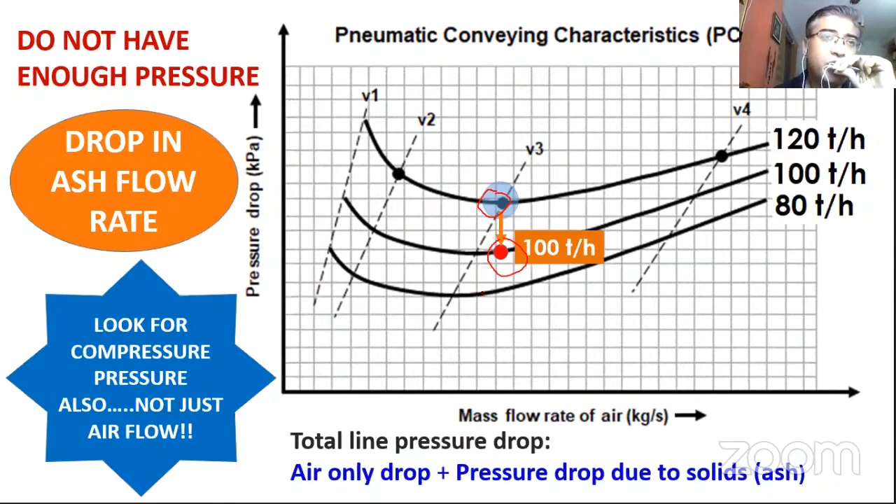Why I'm saying this, although it is very apparent, is that many times people talk of only airflow. How big the compressor, what's the airflow, 7,400, 8,400, 6,000, and so on. You also have to look into the pressure. If the pressure is not there, you won't be able to transport the ash in the right tonnages. You may be able to overcome the blockage, but you won't get the tonnage. So you have to look into your tonnage, pressure, as well as your airflow.

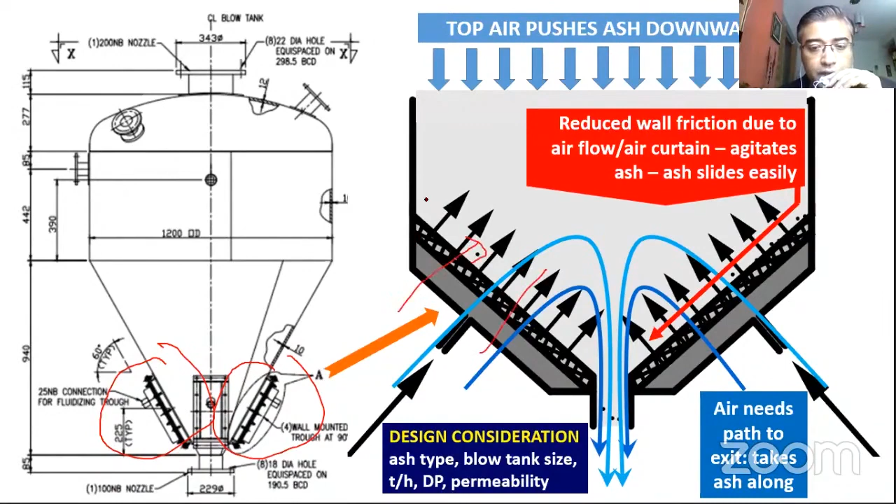And another very important issue is your blow tank aeration. You have to put the right type of aeration pad. You have to put them in the right place. In our lab we use stainless steel sintered pads, and they give you the right kind of air permeability. So when the air comes out nicely, this entire surface over here becomes less friction. I won't say frictionless, but less friction. So the ash can actually flow nicely.

Also, the air that enters has to come out from somewhere, and on that way, it drags certain particles along with it. And I tell you, a little better quality of pad, a little change in fluidization air doesn't seem to be a very big thing, but it makes a huge difference in your tonnages. We have got many experimental data to support that. So this is certainly not an issue that you should ignore.

Another very important point is you have to create a pressure differential across your blow tank. If you don't do that, the ash is not going to come out. This is not an easy path for the air to come in. Air always wants to take the least resistance path, which is the conveying air. Now, if air doesn't come as top air or as fluidization air, it has to come in the blow tank to push the material out. If it doesn't happen, material is not going to come. So airflow control is so important.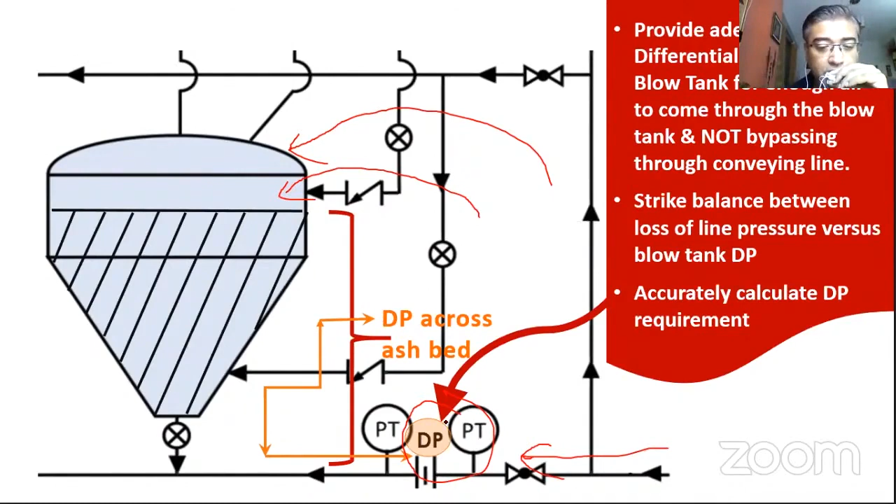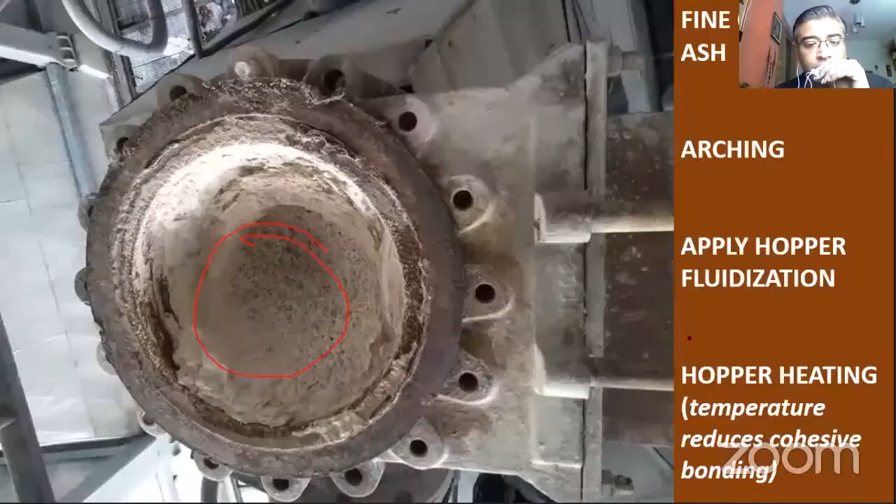So when this happens, what happens to the surface? The surface becomes extremely rough, and when it becomes extremely rough, you have more and more friction. So your capacity reduces, and you start to get ash built up. And you are blaming your vacuum pump, and you're blaming your compressor, but maybe it's just ash is not coming out. So this is one of those 15 reasons.

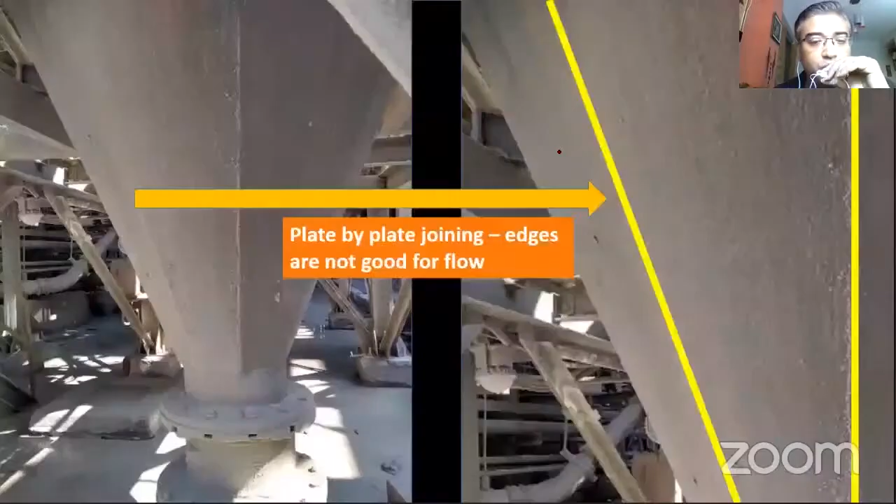Just hang on a sec. All right. So I come to conclusion. I think I have stuck to the time.

So to conclude, understanding is very important in modeling and scale-up procedure. What's happening at the particle level, bulk level, that's very important. You must know the fundamentals. I would strongly recommend you don't see the system and the components in isolation. Many times people pay attention to the system and they don't pay attention to the component, and vice versa. They go hand in hand.

I tell my students that your blood has to be fine, which is the system, but your heart also has to be good. The fibers of your heart also have to be good. Now that's the component. They both have to go hand in hand, and what we need is a systematic diagnosis of the root cause. Root cause analysis is so important.